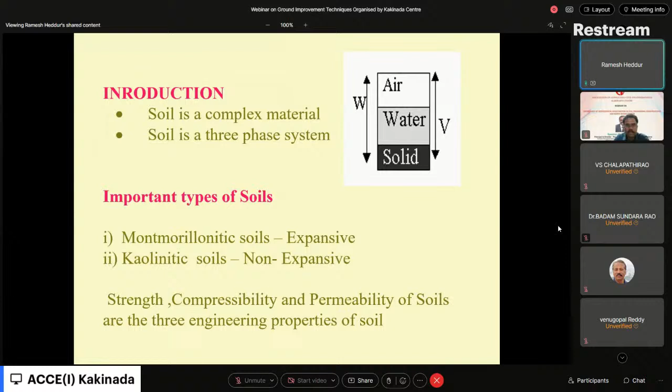Therefore, as a civil engineer, it is our responsibility, whenever you go for any civil engineering constructions, you should know the strength, compressibility, and permeability. These are called the three engineering properties of the soil. So the strength should be high, compressibility should be less, permeability should be less. You should always go for the calculation of three phases.

And the behavior of the soil is always unpredictable. People have done a lot of research. During earthquake, what is the type of loading? Under industrial buildings, what is the type of loading? Under the wheel loads, in case of residential buildings or lightly loaded structures, and settlement of soils - these are some of the behaviors of the soil.

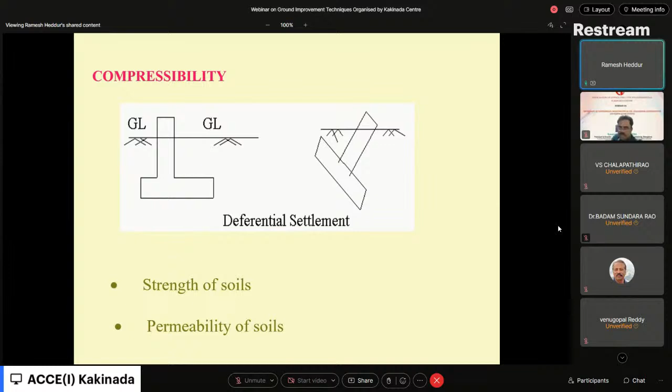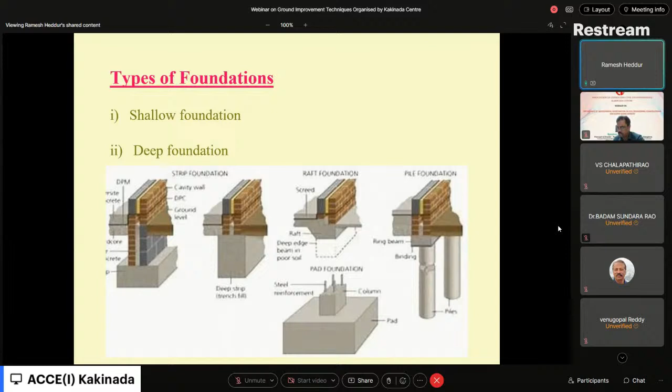So these are the behavior of the soils. If you don't take care of the compressibility aspect, and construct the building without considering the settlement and consolidation aspect, over a period of time, it will overturn like this. Therefore, depending upon the type of soil, you may have to go for shallow foundations or deep foundations, depending upon the load coming on the structure and also the type of soil.

Hence, the exploration, the investigation of the soil below the ground level is utmost important. Hence, to know the index and engineering properties of soil, types of soil, etc., soil investigation is necessary. This is the reason I am giving this lecture to the field engineers.

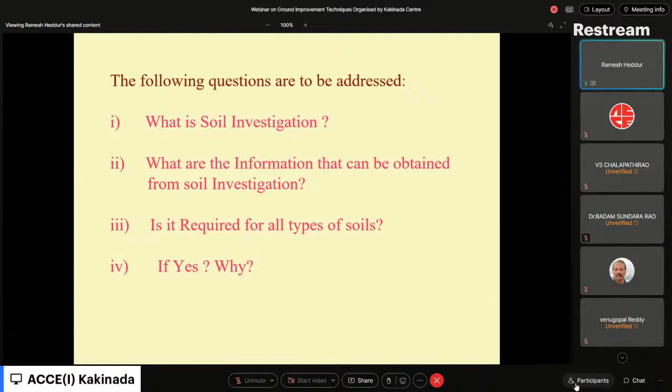Keep in the back of your mind, those who are not aware of these things - of course you are all aware, this is just a reminder. If you realize, you may think, what is this soil investigation? What information can be obtained from soil investigation? Is it required for all types of soils? If yes, why? Generally these questions will arise once we look at this figure.

So the answer is soil investigation is an exploration technique to know the stratification of soil below the ground level, like sand, clay, gravel, etc., and to know the groundwater table, properties of the soil, etc. So we should understand all these things. We can understand all these things by conducting the soil investigation.

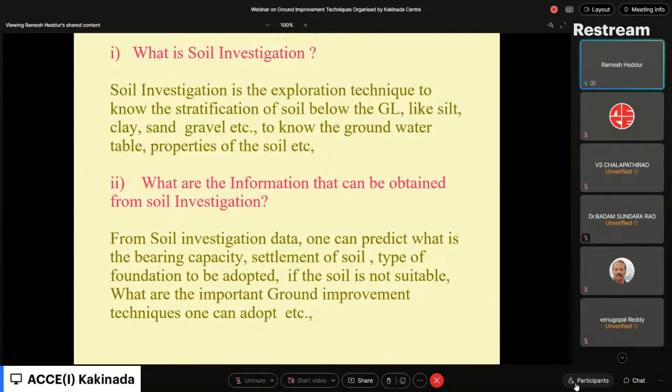And from the information of soil investigation data, one can predict the bearing capacity - that is the strength of the soil, settlement of the soil, type of foundation to be adopted. If the soil is not suitable, then what ground improvement techniques one can adopt - we can always plan. So if the soil is not good, you can always modify the property of the soil.

And one more question - is it required for all types of soils? The answer is yes. Soil investigation is required for all types of soils, whether it is a weak soil or strong soil, since civil engineering structures are constructed on it. If yes, why? Even if the soil is good below the ground level, one should go for soil investigation from the economy point of view. If the soil is soft and weak, then soil investigation is required from the safety point of view. In general, without the knowledge of soil conditions, civil engineering constructions should not be planned, from the economy and safety point of view.

And methods of soil investigation depend on the soil type. So soil boring will be done, the SPT test, field SPT, and SCPT, that is static cone penetration, dynamic cone penetration. For shallow foundations, you can go for plate load test, field vane shear test. If you are going for deep foundation, you need not go for the plate load test - you have to go for soil boring, SPT, and other tests.

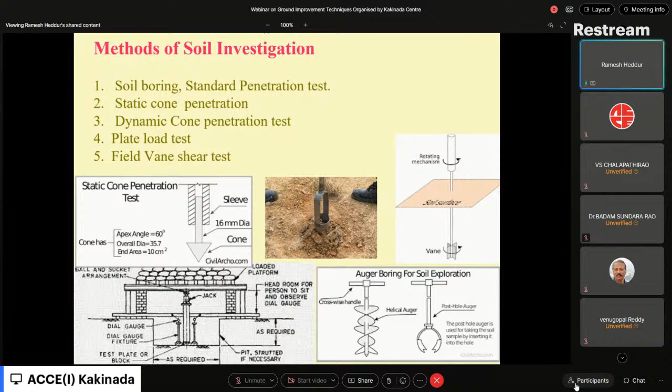And you have to collect soil samples, undisturbed samples and disturbed samples, and conduct laboratory tests like Atterberg limits, grain size distribution, strength test, permeability, compaction, and consolidation.

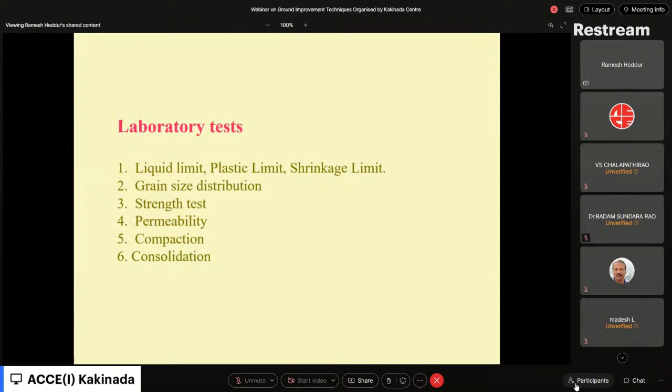And the soil investigation report - you're all field engineers - whenever the soil contractor submits the soil investigation as a consultant, we should first see the location plan where the major buildings are coming, where the lightly loaded structures, gardens, etc. are coming, and the type of structure coming up, and the nature of the soil, and bearing capacity and the settlements, and the recommendations, and the ground improvement techniques if required. These are the important contents of the soil investigation report.

If any one of these points is missing, you can straight away reject the soil investigation report. So you should know all these details. And this is the contents of the soil investigation report. I think now you agree with me.

Safety is a mandatory thing to the construction industry, as the human being is directly or indirectly involved in the construction activity. Their life is more important compared with the luxury of the construction, according to the labor law of Indian construction.

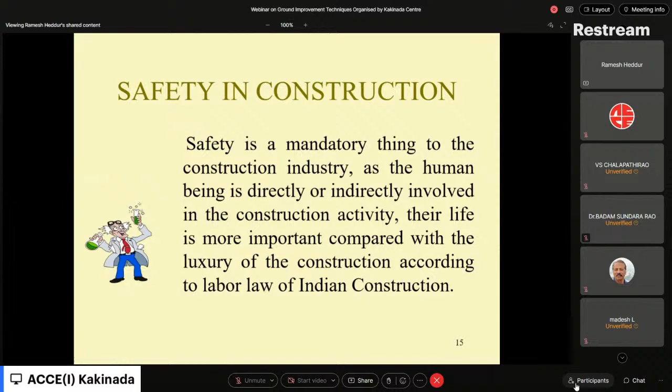Quality of construction as field engineers is grouped into two stages. Number one, quality before starting the construction, which most consultants neglect. This directly depends on the perfection expected and accuracy achieved in the soil investigation. Number two, quality during and after construction, which involves safe design, execution, and maintenance-free construction of the structure with good resale value.

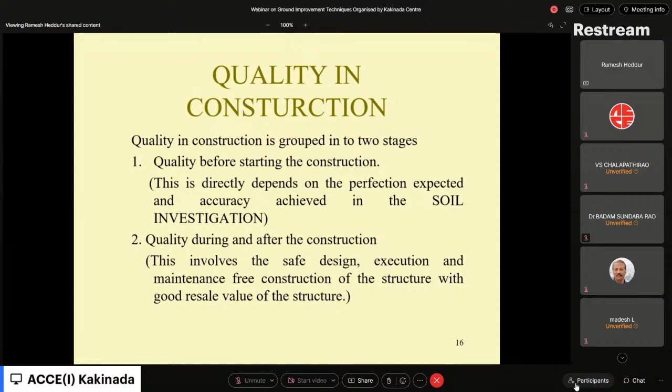So I'm sharing with you one important case history that happened around 2012, when I was chairman of the Department of Civil Engineering, UVCE. You can see this building - it's a 5-story building, constructed on Sarjapur Road in Bangalore during 2012.

This building was constructed based on the soil investigation report of the adjacent buildings. This was a vacant site, and buildings on all sides of the structure were already constructed, with materials dumped here at this site. The contractor of this building did not go for soil investigation - instead, he took the investigation report of the adjacent structures and used that report to start constructing the building.

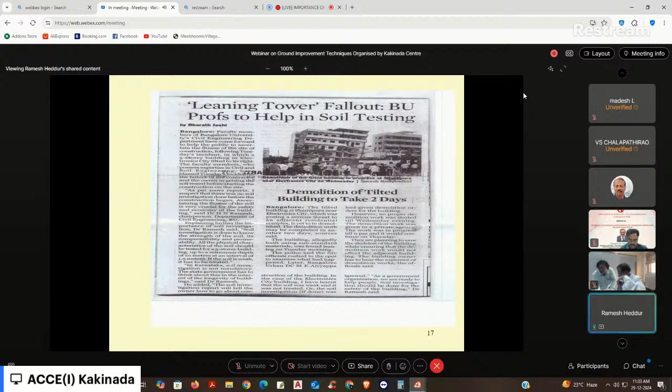For example, for the Metro in Bangalore, for the third phase, they are spending 5 months' time on soil investigation, so people have realized its importance. But for ordinary residential buildings, you should reach clients who are constructing these buildings - even for ordinary residential buildings, soil investigation is very much required, either for safety or economic reasons.

I think all of you agree with me that soil investigation is very much required for the construction of any civil engineering structure. The general definition of soil investigation - not the book definition - is that it's the process of determining the layers of natural soil deposits that will underlie a proposed structure, and their physical properties, generally referred to as site investigation.

We have to understand what is the property of the soil. Our famous geotechnical engineer, the greatest professor of our country, Dr. M.R. Madhav - I'm his fan, I used to listen to a lot of his lectures - very beautifully compares soil with human beings. If human beings are not well, we go to the doctor. If the soil is not well, the doctor - the geotech consultant - will go to the soil.

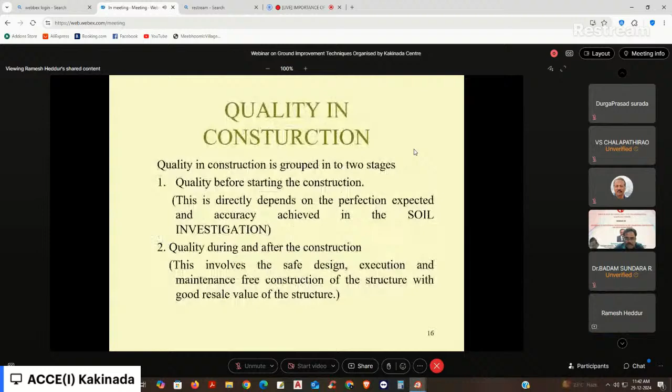In the chat box, there is one question, sir. Shall I read it? Yes, go ahead and read it. Sir, you told that the plate load test is to be conducted for shallow foundation. If so, we normally do this test for pile foundation - is deep foundation wrong? Pile foundation, plate load test, pile foundation test - pile load test, they are doing that. See, pile load test is different from the plate load test.

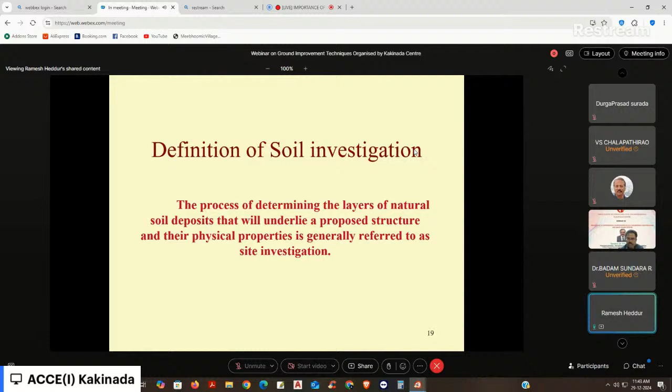See, whenever you are designing a pile, pile is having indeterminacy of nth degree. Below the soil, you don't know. So you will design the pile, and then for the pile, you will do the pile load test. It is not the plate load test.

Plate load test is done according to IS 1888, BIS 1888 1982. It has specifications. You should use plates of sizes 300mm by 300mm by 25mm, 450mm by 450mm by 25mm, 600mm by 600mm by 25mm, 750mm by 750mm, and it will have a pit. Size of the pit is 5 times the size of the plate. If you are using 750mm, it is around 3-4 meters or so. That is called the plate load test.

So pile load test is similar to the plate load test, but you are using the test pile. The theoretical design will be validated using the pile load test. Pile will be used, and that will be a lengthy one. Plate load test has a thickness of 25mm. Pile has how much length? It's a design length.

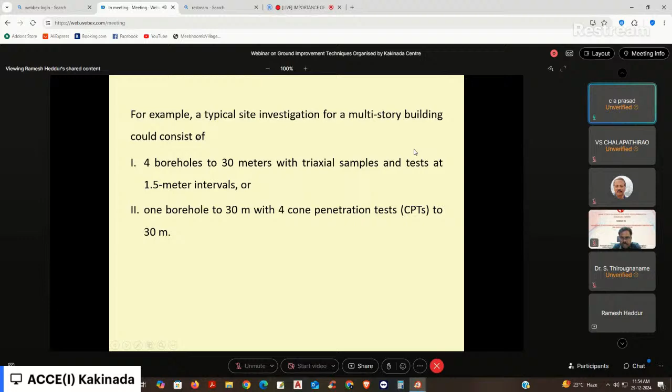Now let me complete - what happens in a residential apartment is that the columns or shear walls are all pretty closely spaced, at a distance of about 4 to 5 meters. And we'll have room dimensions of about 3.5 by 4.5 meters or 5 meters like that. So the columns are pretty close, enclosing the room space.

When they are pretty closer, raft is the ideal situation, not pile. Raft is the ideal condition for an apartment. That is not my question, sir - my question is in the case of an IT building.

I understand what you are telling, but compare it to the piles - the soil investigation should have been done under your instructions. You should not be instructed by the client - this is the soil investigation, that is my point.

No, the point is well taken - what I am saying is, for an apartment client, okay sir, you can go for raft - I am also staying in an apartment - because of differential settlement, otherwise you will go for pile foundation, there will be a differential settlement problem.

Now my point is, we should not be yielded by the clients - this is my investigation, you have to do it. Then you have to tell them it should be certified by a qualified geotechnical engineer, and only then accept, sir. It is our request from the geotechnical side - please accept the soil investigation report.

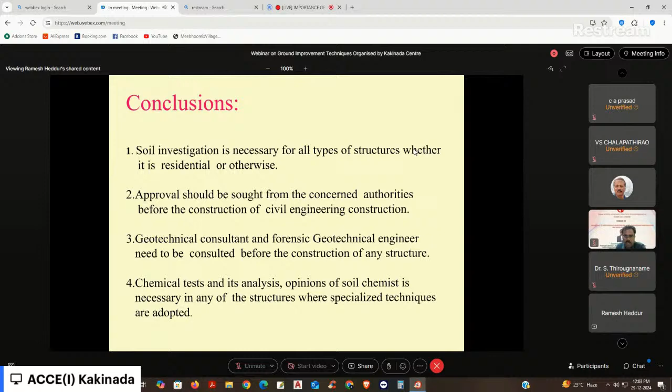We always feel as civil engineers that even natural disasters can be minimized. This is one example I am going to share with you, and I'll put a question to you to decide. Of course, looking at earthquakes on the Richter scale, you can see many earthquakes right from 1960, ranging from 9.5 to 9.1.

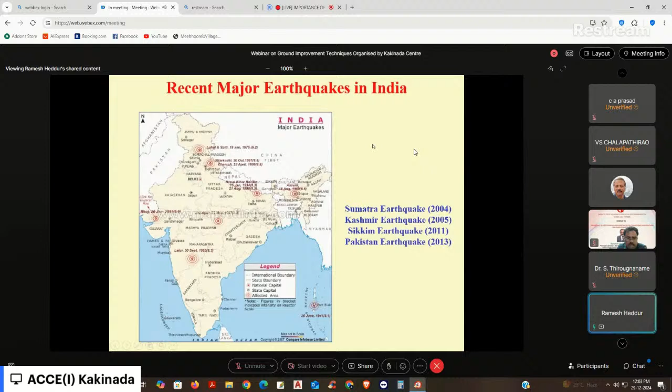So many earthquakes took place in the world, but the major earthquake in India was the Bhuj earthquake. It took place in 2001. You can see what happens when an earthquake takes place. You can see an earthquake cannot be predicted.

In India, we have divided the earthquake zones into zone 1, zone 2, zone 3, zone 4, zone 5. The focus will be below the ground level, about 100 kilometers below the ground level. And if you project it to the ground level, it is called the epicenter, and then epicentral distance. So epicenter is Bhuj.

Now the place of interest is Ahmedabad. It is around 200 kilometers from Bhuj. That is called the epicentral distance. I'm going to show some of the things in Ahmedabad, which has an epicentral distance of 200 kilometers, and the epicenter is Bhuj.

The earthquake may be caused by volcanic eruption or by a strain building process inside the earth mass. It is totally unpredictable. It is the vibration of the earth's surface by waves originating from a source of disturbance in the earth mass.

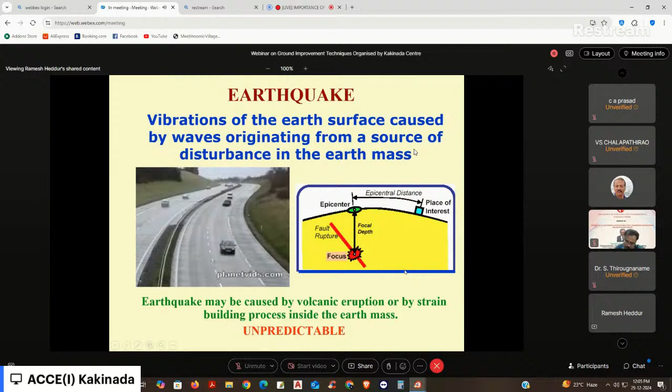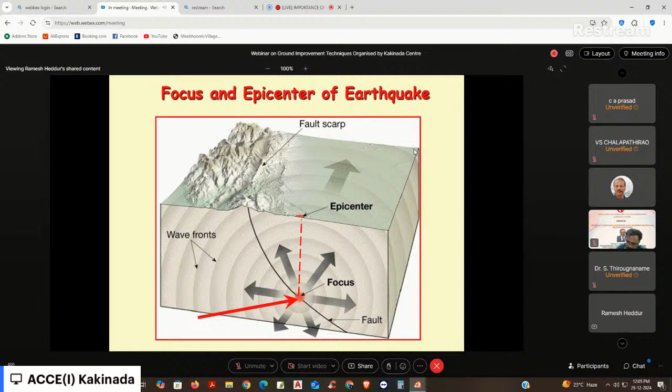You can see here, that is called the focus. You can see the focus, epicenter, wave fronts, the faults. So this is the epicenter.

Now, the earthquake engineering branch is there only in 2 institutes in the whole country. One is IIT Roorkee and the other is UVCE, Bangalore University. In only 2 places we have an earthquake engineering branch.

Compared to all disciplines of civil engineering, earthquake engineering, particularly geotechnical earthquake engineering, is quite young. While the damaging effects of earthquakes have been known for centuries, the strong contribution of soils to the magnitude and pattern of earthquake damage was not widely appreciated until recently.

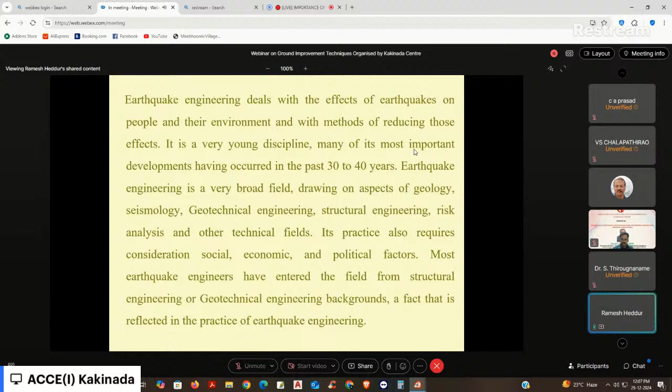Following the damaging earthquakes in 1964 in Niigata, Japan, and spurred by the growth of the nuclear power industry in the 1960s and 70s, the field of geotechnical earthquake engineering has grown rapidly, and it has attracted many researchers over 30, 40, 60 years. Of course, the study of earthquakes goes back many centuries.

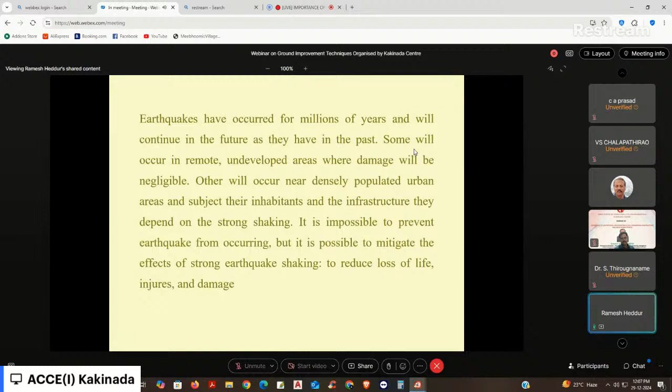Today, hundreds of millions of people throughout the world live with a significant risk to their lives and property due to earthquakes. Billions of dollars of public infrastructure are continuously at risk of earthquake damage. And earthquakes have occurred for millions of years.

Now coming to our discussion, geotechnical aspects of the Gujarat earthquake, that is the Bhuj earthquake. I'm going to tell you briefly about the earthquake, ground movement and liquefaction, foundations, highways and railways, embankments, port facilities, bridges, local experience, codal provisions in India, and concluding remarks.

You can see, on 26th January, Republic Day of India, the earthquake took place at 8:46. Epicenter: western part of Gujarat, as shown. Rann of Kutch, 20 kilometers. Latitude and longitude are given. Magnitude is around 7.7. Focal depth below the epicenter is 18.2 kilometers.

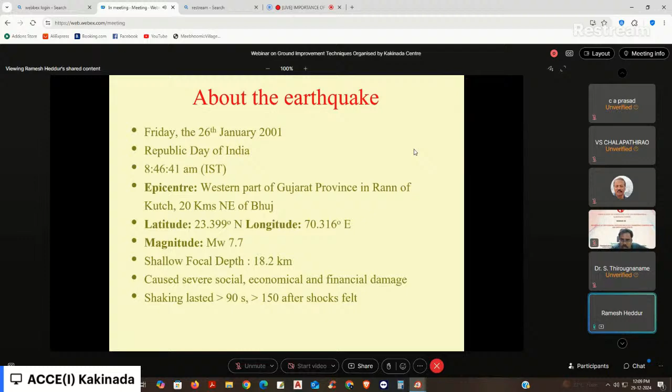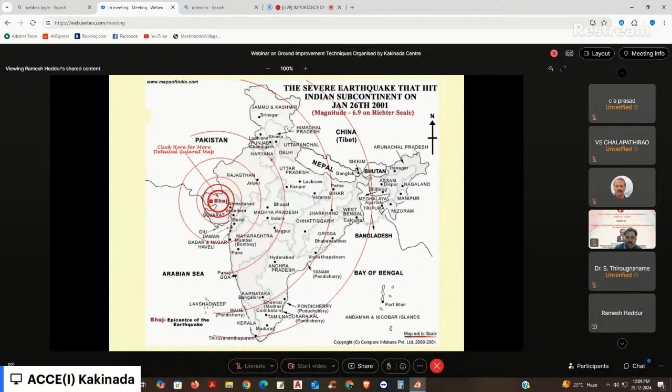16,480 people confirmed dead, 144,000 injured, 200,000 homeless, so many destroyed, 18,000 cattle dead. Damage estimates about $1.3 billion. This is a natural catastrophe.

Now, power and water supply were disrupted. Telecom links with Kutch were snapped. The Surajbari Bridge in the Kutch region was damaged, and irrigation dams were destroyed.

One of the worst earthquakes to have occurred in the country during the last 180 years, for which seismological records are available. The first recorded earthquake was also in Kutch, in 1819. The Latur earthquake in 1993 killed 10,000 people, and it recorded only 6.3 on the Richter scale.

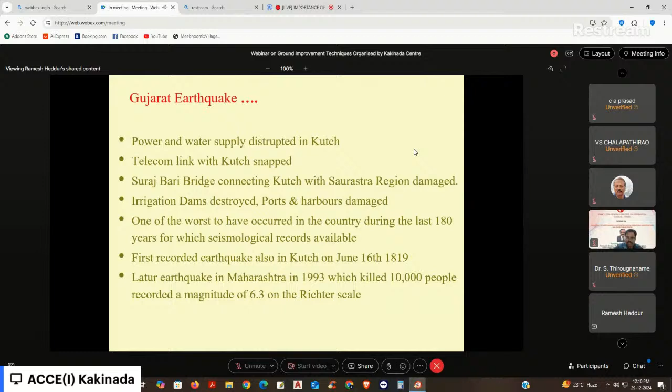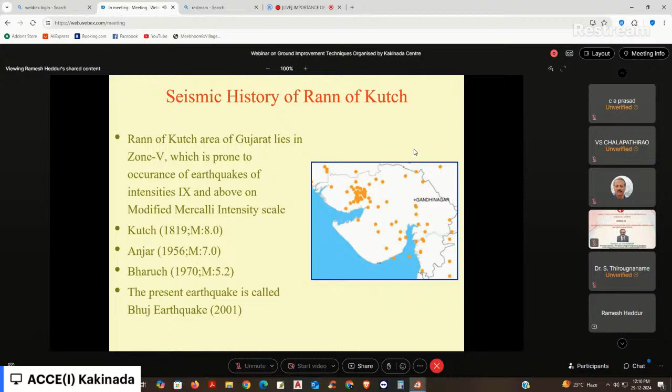So this is the after-effect of the earthquake, about 90 seconds. But the press people, all the press people, in reports in newspapers and magazines, mentioned that it was the 'Republic Day killer.' But they gave a damaging statement: engineers killed people, not the earthquake.

So this triggered us to analyze this particular earthquake data, to show it to engineers from the geotechnical point of view. We are trying to present why the press people said that - they are non-engineering people, but they are directly blaming the engineers. It is a natural catastrophe - how are the engineers responsible? So that's what we are going to discuss now.

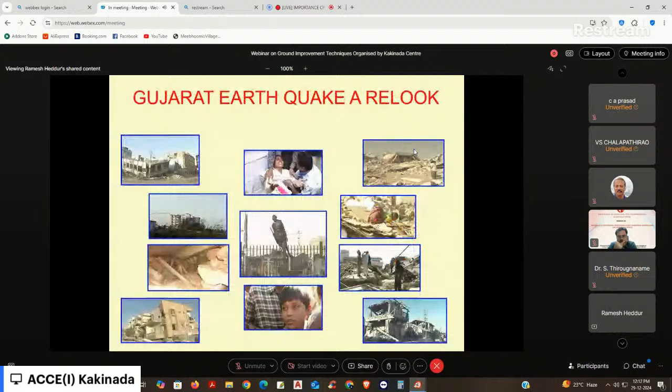You can see the ground breaks happening here. It actually happened due to liquefaction. I will tell you about liquefaction of soil. Liquefaction of soil is nothing but when the total effective pressure is equal to zero.

You must have studied the total pressure when a load is transferred from the superstructure to the foundation, then to the soil. There will be resistance from the soil. Soil will have the solid as well as the water, and water has its own property.

Water will always maintain the horizontal level, and the depth of water will not be known to you. For example, if you go to a swimming pool, you will not know the depth unless they put it as 0.5 meter, 1 meter, 2 meter like that. So the depth will not be known.

And then water cannot be compressed, whereas air can be compressed. That is the reason why in transportation, air can be compressed into the vehicle, and then the vehicle can move. If you take water and compress it, it will not be compressed.

Water is so adamant. If you apply load, the load is transferred from the superstructure of the building to the foundation, then to the soil. The water will resist individually - that is called the pore water pressure. And the soil will resist individually - that is called effective pressure.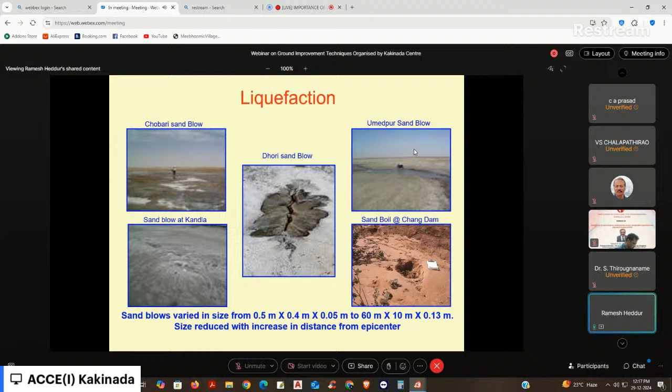So when the total pressure below the foundation becomes zero, what will happen? The building will definitely collapse, and railway tracks will become unparalleled. Sand blows varied with size, and size reduced with increase in distance from the epicenter. You can see the liquefaction failures.

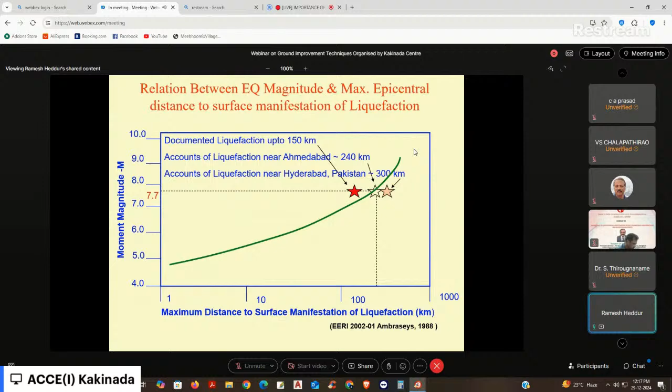This is the relation between this one, and also the rock slides from moderately sloping hills. And lateral spread - this is also due to liquefaction. Lateral spread.

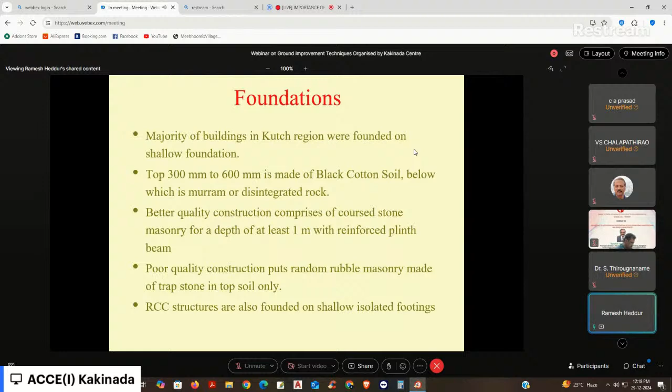When the foundations were analyzed, the majority of buildings in the Kutch regions were founded on shallow foundations. The top 300 to 600 mm are made in black cotton soil - only the top 300 to 600. Better quality construction comprises coursed stone masonry, while poor quality construction - RCC structures - are also founded on shallow isolated footings.

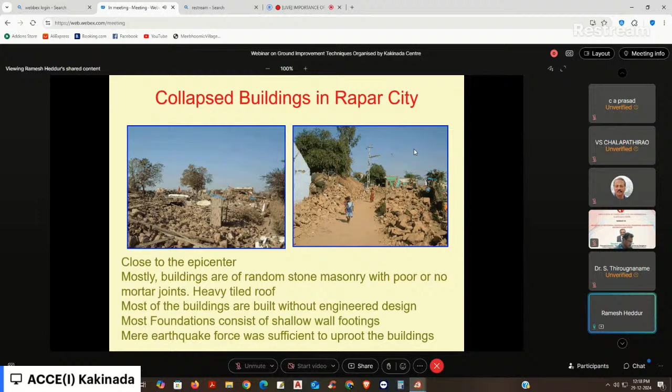The foundation consists of shallow wall footings, where even a small earthquake force was sufficient to uproot the buildings. You can see here the apartments failed - multi-storied buildings.

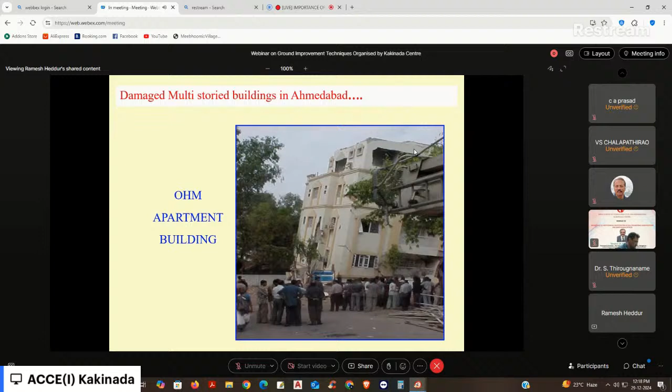Akashdeep apartment in Ahmedabad, which is 250 kilometers from the epicenter. OHM apartment, Ahmedabad. The common factor found in all these is that they are all situated in Ahmedabad, more than 100 in number, perhaps on soft alluvium, and all are RC 4 to 5 and even 10-storey buildings.

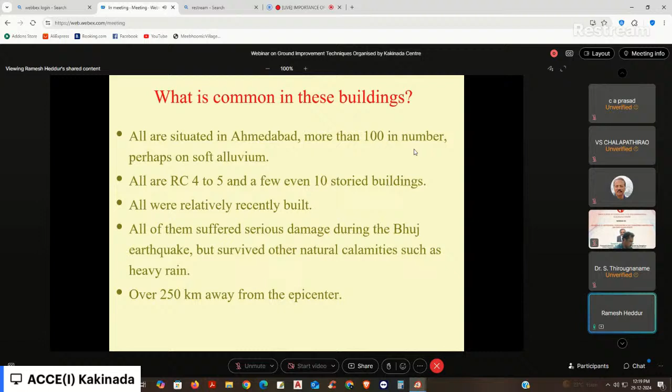All are relatively recently built. All of them suffered serious damage during the Bhuj earthquake, but survived other natural calamities such as heavy rain - over 250 kilometers away from the epicenter, not 200, 250 kilometers away from Ahmedabad, it happened.

Now the question arises in your mind - is it bad construction quality? Not following the building bylaws of the city? Improper design? Not considering the earthquake? We have a zonal earthquake condition, zone 3. Stress on economy, poor material standards, liquefaction of ground - you have seen the liquefaction also, or something more.

These are the questions we should ask. If you go on answering these questions, press people will take it as a chance and leak it to the press. As engineers, we have to question ourselves. All these are very important questions, but fortunately press people did not know these questions at that time.

In soft alluvium, amplification of the ground motion was as high as 19.46. The estimated natural frequency of the ground, the natural frequency of the multi-story structures, and the predominant frequency of the earthquake matched, meaning the operating frequency and the natural frequency ratio equal 1. When it is equal to 1, or between 0.5 to 1.5, resonance occurs and the building collapses.

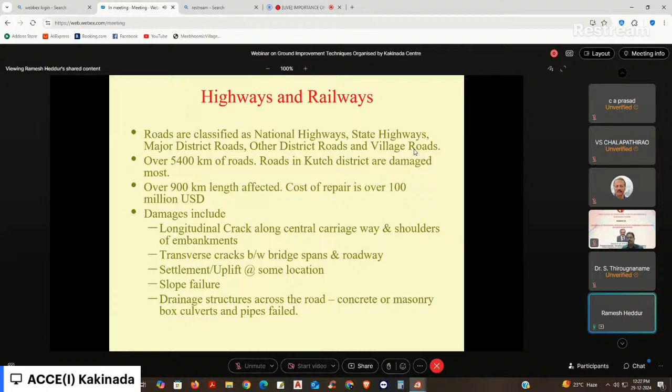You can see the damages. The national highways - there are over 5,400 kilometers of roads in Kutch district that are damaged, with 900 kilometer length affected. Damage includes longitudinal crack, transverse crack, slope failure, drainage structure damage, etc. Some railway bridges were also damaged, bridge approaches settled, lateral spreading occurred, and the railway line near Navlakhi port experienced settlement of the order of 3 to 4.

Here's an important point: there was no damage to the runway in the Kutch earthquake. Whenever an airport is constructed, sanction will not be given unless all the soil testing is completed. They did perfect soil investigation, so nothing happened to the Bhuj airport during the earthquake, even though ports failed, dams failed, and buildings failed. It's a natural disaster - it does not show partiality.

The natural disaster was resisted by our engineers - hats off to them. Whereas for the other failures, those involved were non-engineers or not aware of soil conditions, not aware of resonance conditions. For the airport, everything was taken care of - resonance conditions, block vibration tests, all dynamic tests were conducted - so nothing happened to the airport. This is one of the things you can answer. I leave these questions to your discretion; I'm only giving the answers.

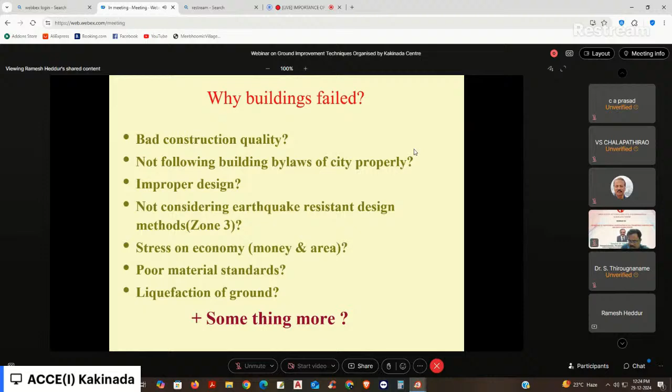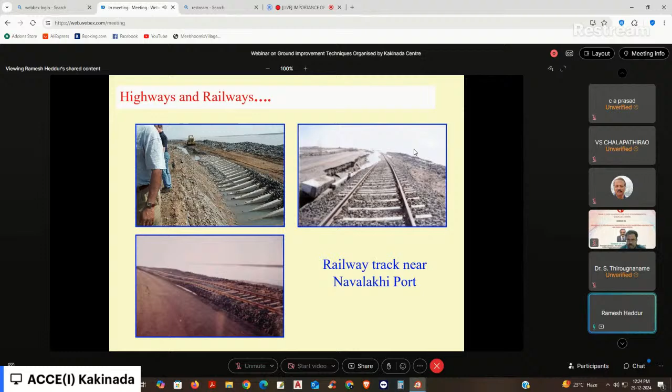So for highways and railways, you can see here - railways failed, Navlakhi port failed, all the dams failed - this is classical geotechnical damage. Do you know what classical geotechnical damage is? These are all available in our journals, already reported by our researchers.

Our geotechnical experts will know this: for a particular type of soil and a particular type of load, this is the type of damage that occurs. Most of the damages are classical geotechnical damage, not new damage. We could have predicted this - a forensic engineer would have predicted this. Again, this shows the importance of why the geotechnical expert is very important in any civil engineering structure.

We could have saved many of the dams - out of 20 medium and 165 minor dams in Kutch, and 144 medium and 17 minor dams in Saurashtra. See the Ratiya Dam location here - Ratiya Dam is situated around 5 kilometers northwest of Bhuj.

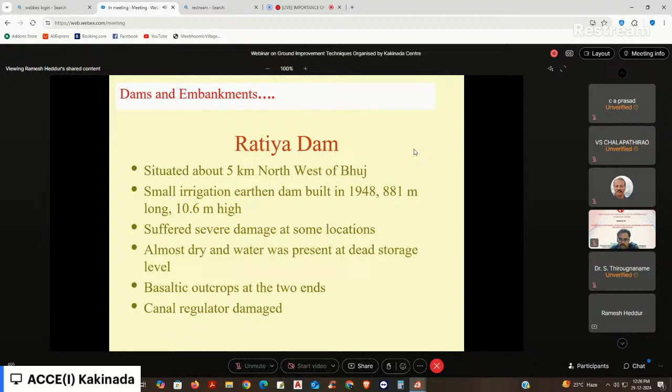This small irrigation earthen dam suffered severe damage, almost dry, with dead storage water present, basaltic outcrops, and canal regulator damage. So it was almost dry - that's one of the cases.

You can see the Surajbari bridge - it failed. Note below: the new highway bridge under construction, and a view of the existing highway bridge near Surajbari. The existing bridge sustained heavy damage during the Bhuj earthquake. Can you see the comparison between the new bridge and the old bridge?

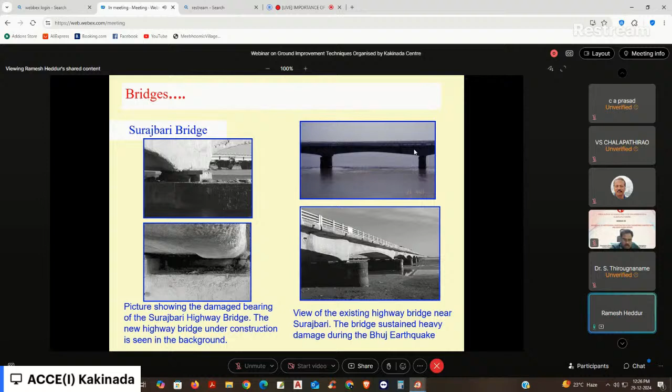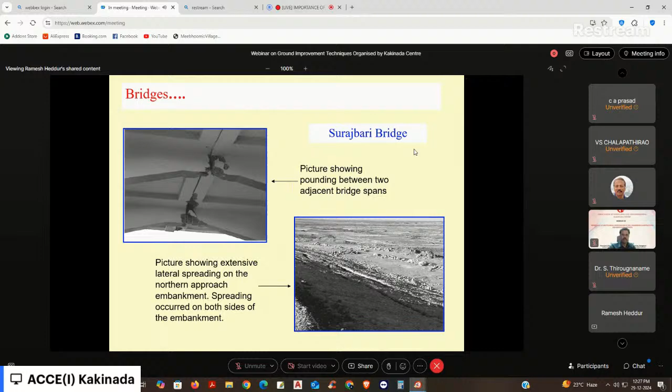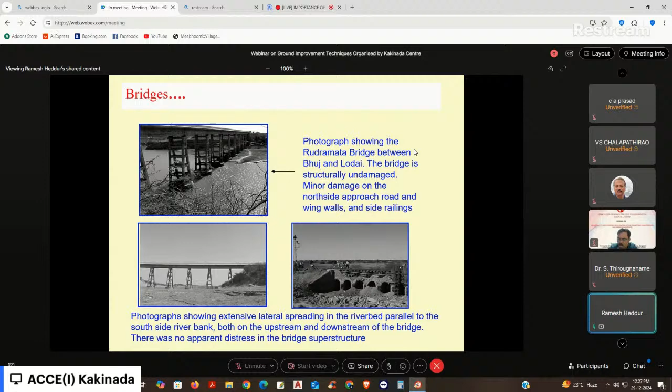Then a photograph showing the Rudramata bridge - there was no apparent distress to the bridge superstructure. This is very interesting. Here's a picture showing a damaged stone masonry arch bridge, built in 1912. Several stone masonry bridges and buildings have been destroyed in this quake.

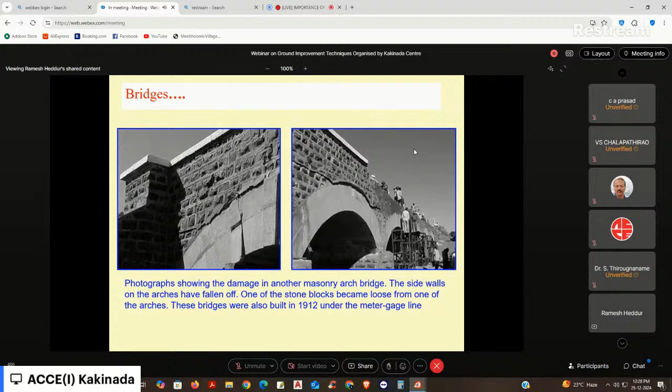Railway and bridges. Listen to the railway and highway bridge. The highway bridge also failed.

Here also, last point, you can see there are signs of liquefaction and lateral spreading at this location. Total effective pressure below the ground level is zero, means gone. The soil flows like water. On a water foundation, a structure will not stand, it will fail. Liquefaction happened here.

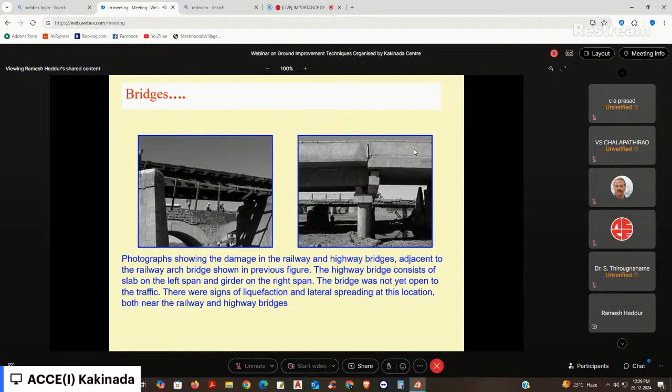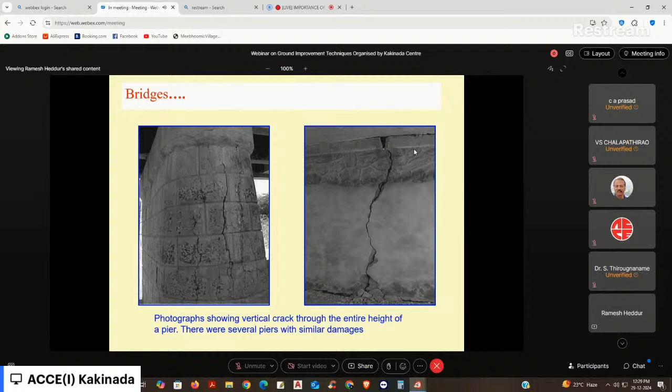Here also the failures. And a vertical crack, the entire height of the pier you can see, recently constructed. Severe damages.

Kandla port also failed. See here, 6-story port and customs office in the failure condition.

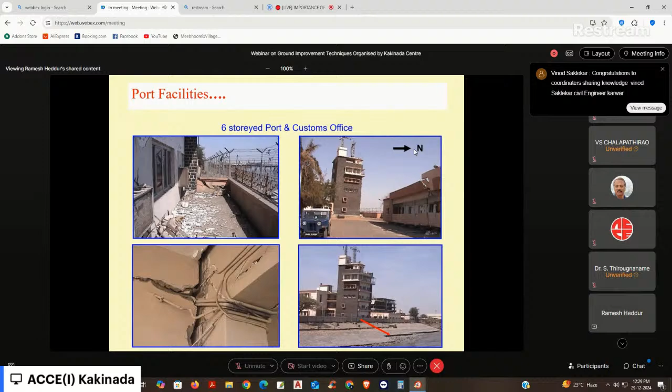Again, in our report, lateral spread liquefaction. Whenever a sandy area is there and some machine vibrations are expected, or it is an earthquake prone area, we should take care of controlling the lateral spread, that is the liquefaction of the sand. If it is a soil having only clay, liquefaction will not take place in clay area. Liquefaction takes place only in the sandy area.

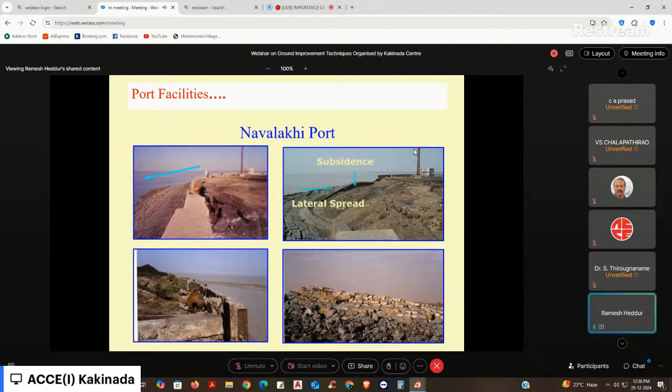See again, ground cracks. So both the ports suffered damages. Damage in Kandla port included failure of pile foundation. Damage in Navalakhi port consists of lateral movement of walls, ground movement, ground break, etc.

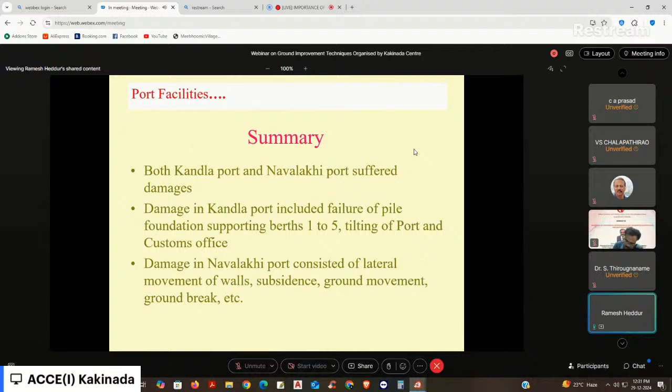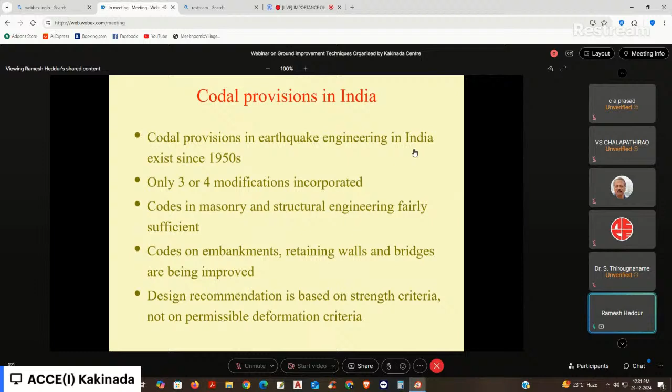So, codal provisions in India. Codal provisions in earthquake engineering in India exist since the 1950s, but only 3 or 4 modifications are incorporated. For example, the RCC code, code 456. When I was studying in 1981, now it has a lot of changes and a lot of revisions. Whereas the earthquake code doesn't have the revision.

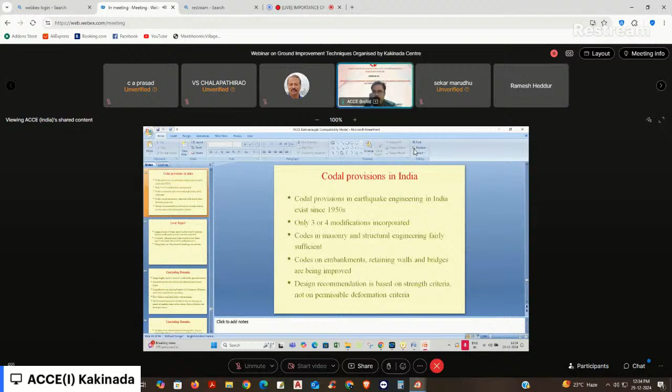See, codes in India for masonry and other things, we have a lot of revisions. Whereas for earthquake, up to 2001, we had only 3 or 4 modifications. That is one of the reasons the codes are not available. And design recommendations in that particular region were based on the strength criteria, not on the permissible deformation criteria. So in soil, we should take care of the deformation criteria also, consolidation and compressibility criteria.

Okay, next one. Next slide please. This is a very important local report. Go to local report. See, it's a very interesting one, you can have a look.

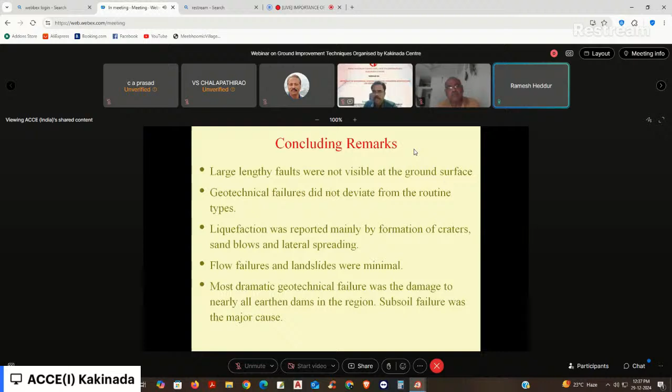Flow failures and landslides were minimal. The most dramatic geotechnical failure was the damage to nearly all earthen dams in the region. Subsoil failure was the major cause - you can see, last point, subsoil failure. That means soil investigation was not done properly there. People had not understood what soil investigation meant at the time. That is one of the major causes.

All dams were almost empty - we are lucky actually, following two seasons of drought, otherwise damage would have been more severe. And the Surajbari Highway Bridge was the only major bridge to suffer.

A few old and small bridges failed. Most buildings in Kutch were built on shallow foundations. Buildings along with foundations were uprooted by the mere earthquake force because of closeness to the epicenter.

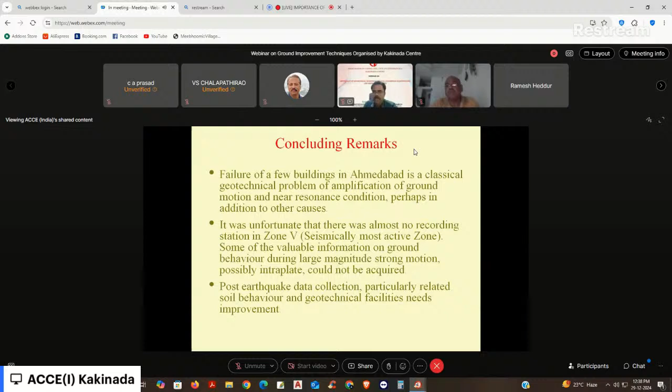The IS code is still being improved. The design of embankments and dams is still based on strength, present day understanding of design from the consideration of allowable settlement, which needs to be practiced. This is one message to our practicing engineers: settlement criteria should be taken care of in all designs. It is very important whenever you come across soil.

Microzonation of important cities, particularly in seismically active zones, is useful. In general, the Bhuj earthquake was an eye-opener to bureaucrats, politicians, the general public, technologists, and researchers in India. Engineered structures fared better, I think you agree with me on the Bhuj earthquake also. Even a small residential building should be constructed with the plan of an engineer - then they can save around 50% of the construction cost. We should give publicity to the public about this. Engineered structures fared better, suggesting the importance of adopting strict seismic design in areas prone to earthquakes.

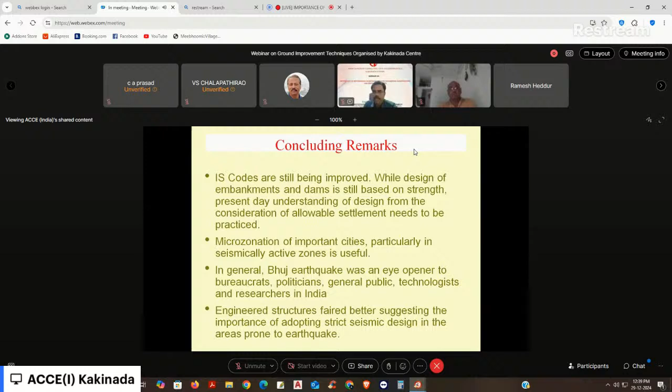This is one of the questions posed by press people: why did the elevator survive while the rest collapsed around it? This is because other buildings also would have survived if they had conducted the vibration test and maintained the natural frequency or the resonance value below 0.5 or more than 1.5. This building's pillar must have by chance got the resonance condition below 0.5 or above 1.5. Resonance is nothing but the ratio of the operating frequency to the natural frequency. The natural frequency is the frequency of the soil foundation system, which can be determined using block vibration tests and other techniques. So they could have conducted the test, but they have not done it even though it's an earthquake prone area. In earthquake prone areas, whenever you are designing a machine foundation, you have to find out the natural frequency of the soil foundation system before going for any machine foundation.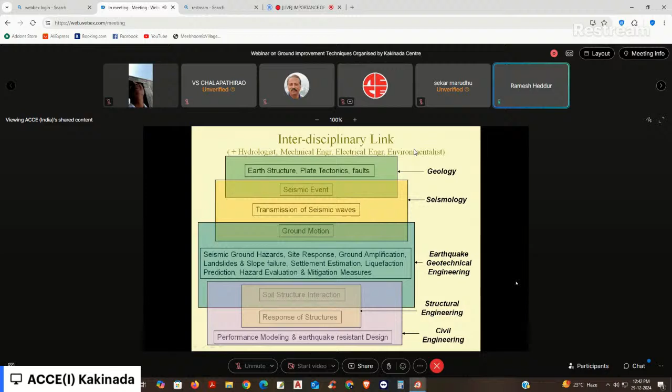And also, you're all field engineers. See, all of you are field engineers, honorable field engineers. I would like to bring to your kind notice the interdisciplinary link. As civil engineers, we always feel that structural engineers are only civil engineers and we are only supporting engineers. Yes, we agree.

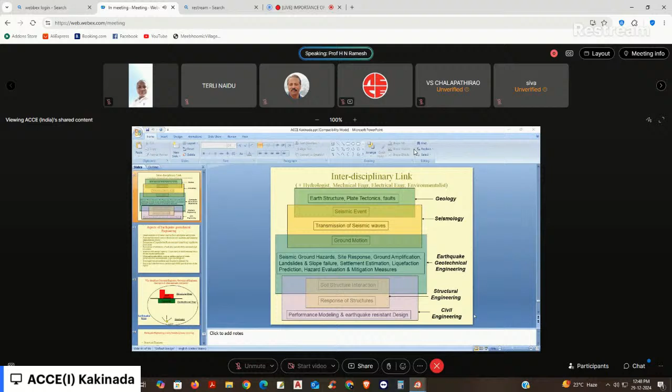Geologists will give earth structure, tectonics, etc. Seismologists will give the seismic event. Earthquake geotechnical engineering will give ground hazards, response, etc. Structural engineering will give soil structure interaction and response of structures, and civil engineers in general give performance modeling and earthquake resistant design.

Next slide. See here, aspects of earthquake geotechnical engineering: it is nothing but dynamic loading from anticipated earthquakes, field and laboratory tests to determine modulus and damping characteristics, estimation of liquefaction resistance, estimation of settlement due to dynamics, analysis of bearing capacity due to dynamics, other earthquake effects, site improvement, building code provisions, etc.

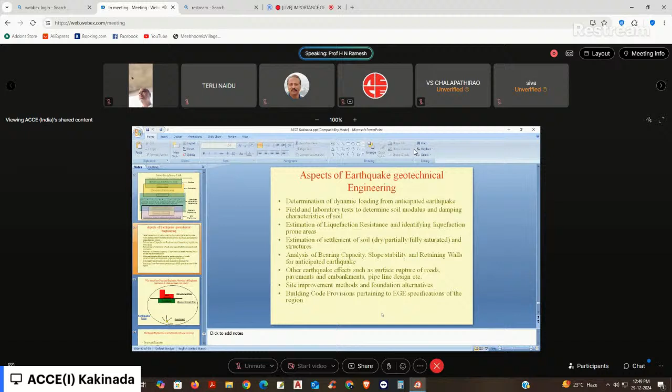I think you agree with this figure. Connection: why should not structural engineers, geotechnical engineers, geologists, and other engineers join hands? Structural engineers design above the ground level. Geotechnical engineers give the properties below the ground level. Geologists give the general properties of the soil, and this helps us in designing earthquake resistant structures.

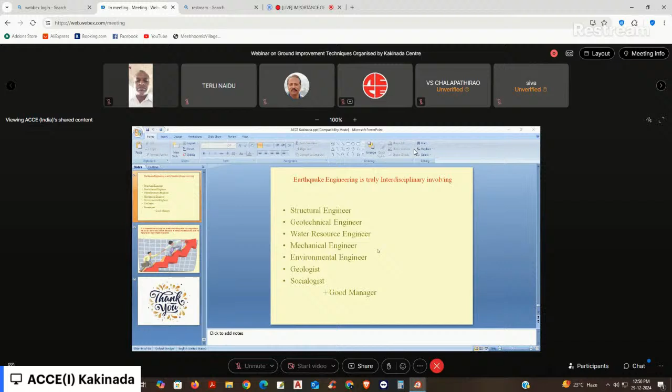It is impossible to stop or predict earthquakes. As engineers, let us all unite and move forward and reduce calamities due to natural or man-made hazards. Thank you.